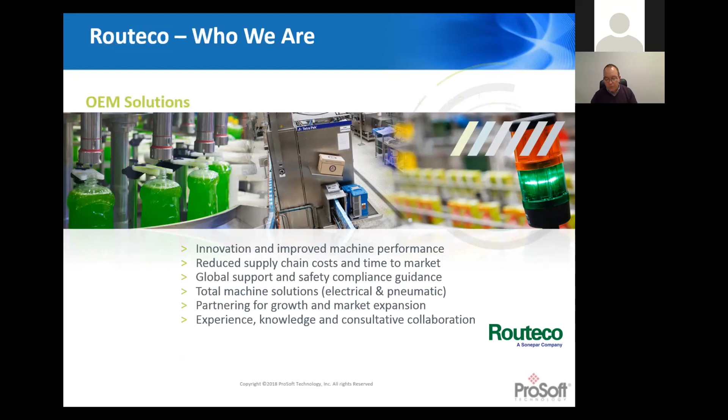We've got a national chain of offices covering the UK, Ireland, and the Netherlands. We offer solutions for OEMs, machine builders, bringing value to the OEM business. We also have a range of manufacturing solutions, such as training services, engineering services, safety services, online and telephone support. This is in addition to value-added services such as assemblies for repeat small panels, e-business solutions, technical support and training.

Routeco have got teams of product support specialists around the country who are ready to speak to you about today's material handling seminar. We have expertise with ProSoft, we've lots of experience, and we're ready for your call. So, without ado, let's pass you back to Miles, who's covered part of today's product and application content. Thanks.

Thank you, Steve. So now I'm going to quickly talk about who ProSoft Technology are.

ProSoft Technology are industrial communication solution providers. Basically, we help you to connect to, optimize, modernize, and migrate legacy applications to modern Ethernet-based solutions. We can help you to connect all those legacy systems to your existing PLC, and we have the application expertise to back that up. We are very focused in solving our customers' challenges through our range of solutions, and customers trust ProSoft to help them to deliver what we say.

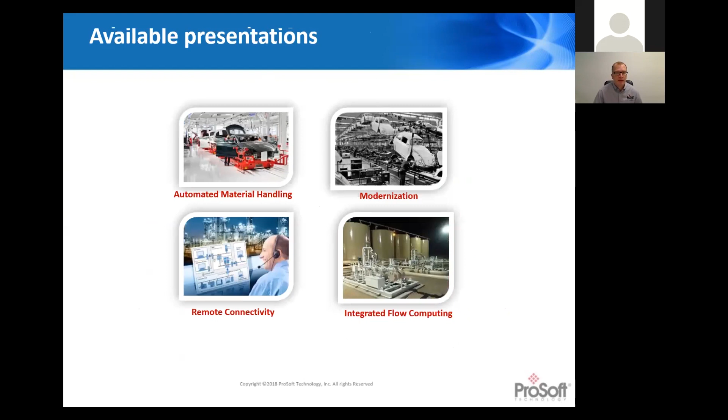So what I'd like to do now is to talk about automated materials handling and the wireless solutions involved in that.

So what type of solutions are involved in automated materials handling? Well, the obvious one is AGVs, or automated guided vehicles, where they take the heavy loads around the factory as an alternative to forklift trucks. Then we have the electrified monorail systems and skillet conveyors, which are mainly used in automotive manufacturing, but can be used anywhere to basically carry the car or the heavy load around the factory so people can work on it as it's rotating around. Then there's also the warehousing solutions, which we can use, which is the automated storage and retrieval systems, sometimes called rack stackers, and also the crane systems.

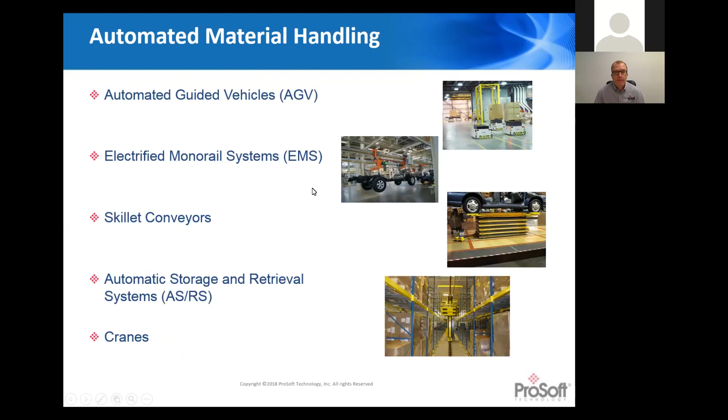So why do customers use automated materials handling? Well, the first one is obviously to reduce labor costs. In an ever-increasing labor market, reducing labor costs is a quick way to reduce your expenditure.

Also, a lot of accidents are caused by forklift trucks as they travel around the factory. So to improve worker safety, a lot of people are now integrating AGVs into all sorts of different markets, not only in automotive, for example, but also in places like healthcare and things like that.

Also, we can improve operational efficiency by eliminating faults due to human error, and helps manufacturers to achieve higher quality, reliability, and efficiency through an automated materials handling solution. Also, it provides access to hostile environments, so cold storage, clean rooms, where there may be an environmental issue. Also, by making it automated, it removes or replaces that kind of human error again, where they could pick the wrong parts, etc., and also damage the products in transit.

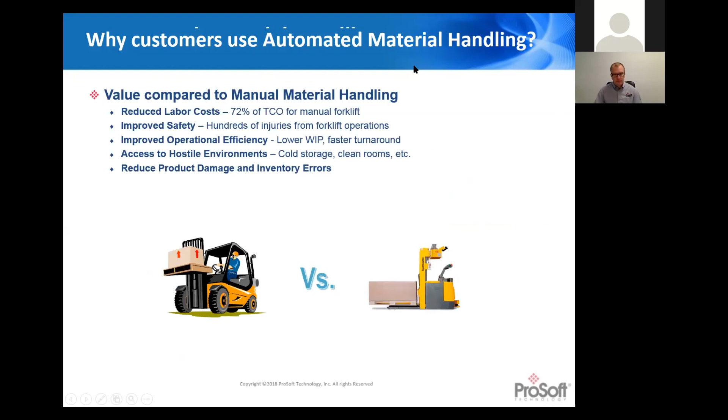However, in industry, there's lots of RF noise, which can impact on your wireless network. Also, constantly moving parts, which can cause reflections, and obstacles to the wireless system as well.

You're working in a very enclosed space with unusual work paths, and a commercial radio, for example, may not work correctly because it may cause you to have timeout, because commercial wireless systems tend to be very good for sort of printing or Netflix, for example, where you don't really care if it's buffering. But if you have a wireless problem, it then causes a network controlled timeout.

Also, the environment, you have to look at the environment as well when you're looking at a wireless solution. And of course, you've got to maintain it, and your maintenance people may not be wireless experts. So you need to have partnership with a company that can help you to get the best out of your wireless system. Also, you may be building a plant in a remote location or a country where you need to have the local certifications in place to have that reliable communication for I/O and safety equipment.

There are challenges with the robust network. Advanced machines need a highly reliable, high-speed Ethernet-based communications, so they need to have the same for the wireless communications. And each end user environment is different. We always look at these things separately, just so we're not doing that kind of cookie cutter type application where you think it's going to work in one place or work in the next place.

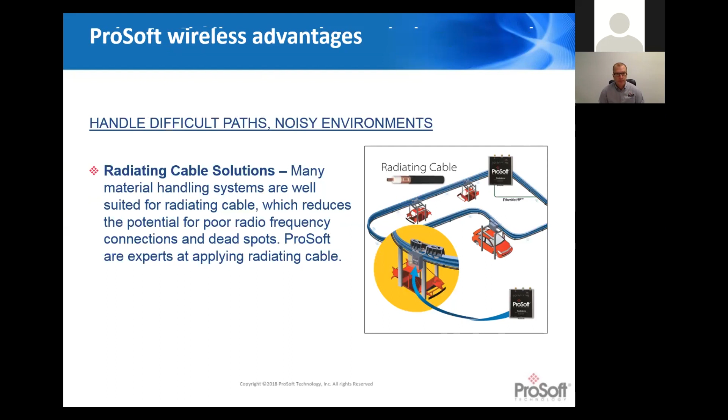However, our products are industrial rated products. They have an extended operating temperature of -40 to +70 degrees, hazardous location certification, and industrial power options, either through 12 to 24 volt DC or through power over Ethernet, which has advantages.

So if you wanted to reduce the losses from the antenna to the radio, you can actually move the radio closer to the antenna and run the power over Ethernet cable back to the main switch. It's DIN-rail mountable, so you're not in a situation where it could fall out. Also, it's shock and vibration tested, so for those mobile devices going around the factory, there will be vibration from the actual machine. We also have all the local country approvals and certifications required for you.

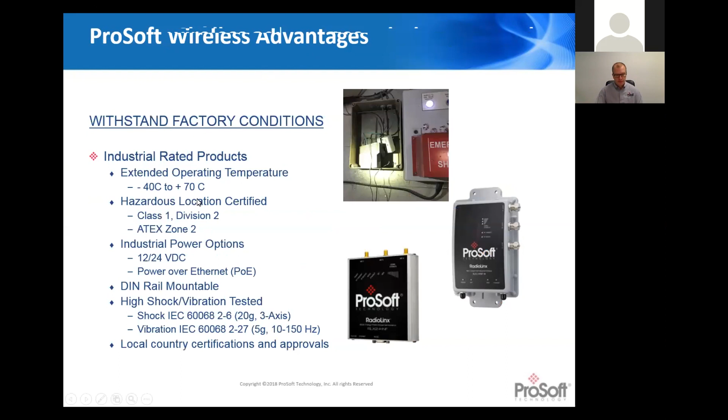We have tested RLX2 radios, and we noticed that one access point is configured as a master. Does this master take part in the roaming process, or do the clients roam independently?

Basically, it's all part of a bigger system. I'll come to the details of it later on, but the radios themselves continuously check the best signal to the access points. So it's mainly on the client side to the master, but it's continuously checking for signal strength, whereas other competitor solutions may use a threshold limit, for example. If it gets below that, then it would roam. But ours is continuously searching for the best one, and then it would roam to the latest client.

Okay, this is one of the first success stories I'm going to talk about today. We had a car manufacturer that needed to reconfigure several plants to manufacture new models. Every time they brought a new car out, they had to change it slightly. These lines require highly reliable I/O communication between the moving AGV and the skillet to the master control system. But the automotive plant itself presents many issues for wireless applications, including interference with surrounding networks, reflections from metal parts, moving parts, mobile obstacles, and unusual paths of the vehicles.

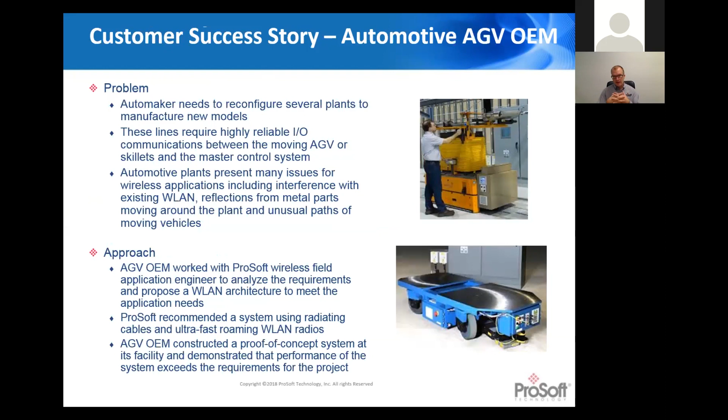So the AGV OEM worked with Prosoft field application engineers to analyze their requirements and propose a wireless network to meet their application needs. Our application engineer recommended a radiating cable solution and our fast roaming wireless LAN access points. The OEM created a proof of concept system at the facility to demonstrate it to the customer. The customer selected our RLX2 IHNF radios for their ultra fast roaming capability, and they also selected the radiating cable because it had several advantages, one being consistent signal strength along the carts throughout the pathway.

And the leaky feeder followed the track of the conveyors, so it's nice and easy to set up as well. And we had the experience - pre-sale and post-sale support was a key value for that OEM.

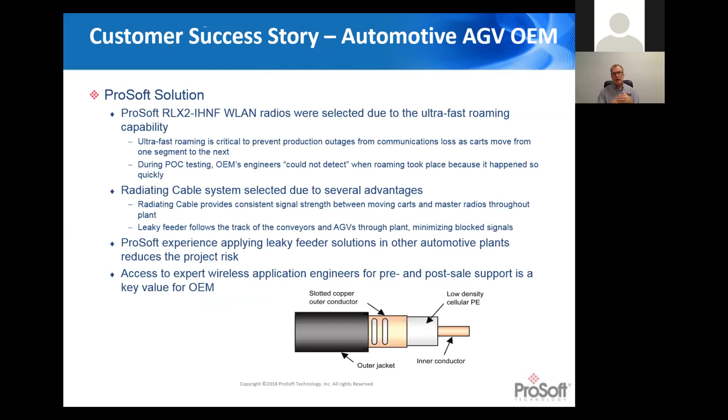This is an automated storage retrieval system, or a rack stacker application. This is for a steel manufacturer in the UK who needed to put heavy duty steel coils onto a shelf. The shelves themselves were very narrow, and they were concerned about reflections from the coils and shelving units, which would cause them issues in the past.

So they worked with Prosoft and Routeco to upgrade their DH Plus system to a modern ControlLogix system, introduced an Ethernet IP network, and also used our radios with a Radiating Cable solution, which was mounted along the line of the rail that carried the AGV - the automatic storage retrieval system - backwards and forward, picking up the heavy coil and putting them onto the shelves.

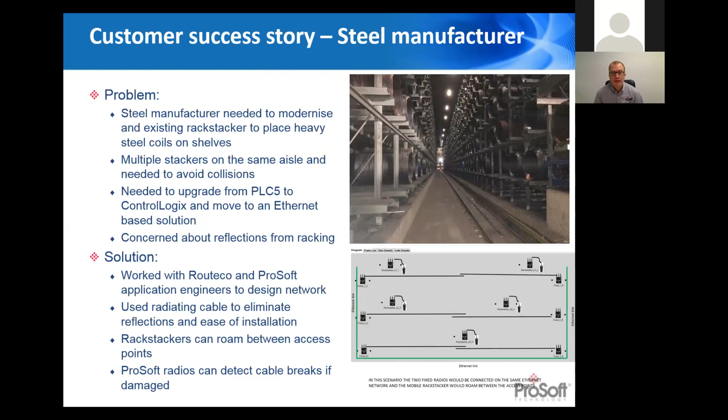Also, they were concerned about cable breakages and being able to detect that, because they'd had an issue where one of the systems dropped the coil onto the rail and broke it. So with our radios, you can actually detect a break in a Radiating Cable solution.

So these solutions can be used in any sort of environment - not only in automotive or heavy use, but also in healthcare and also in amusement rides, which is what this OEM did. They had a problem to replace the slip ring, which required a lot of maintenance.

They also wanted to build a system which would allow CIP Safety communication through it as well. So we proposed a solution which involved our radios with Radiating Cable, so they could improve their data transfer, increase their reliability, and also have secure and stable communication.

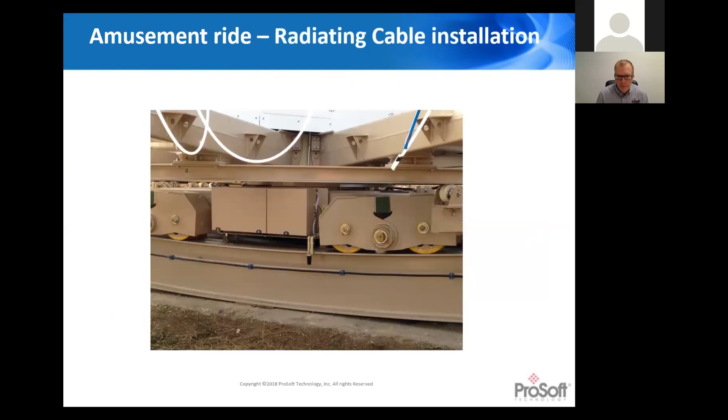It can also be used on packaging machines, so anything that's moving or rotating - any slip ring replacement - you can use our radios with it as well. This customer was an OEM who had machines for sleeving applications. They had a need to replace the slip ring communication with a more reliable, robust one.

And they used our radios with Radiating Cable with two rotating tables, and one master radio was able to receive data from two rotating tables at the same time, thanks to the installation of two Radiating Cables and repeaters.

This is an example of a crane application at a terminal at the dockyard. Basically, the customer needed to increase their operational efficiency, enhance industrial safety - so there was a safety element to it - but then also had to improve the working environment for the crane operators themselves.

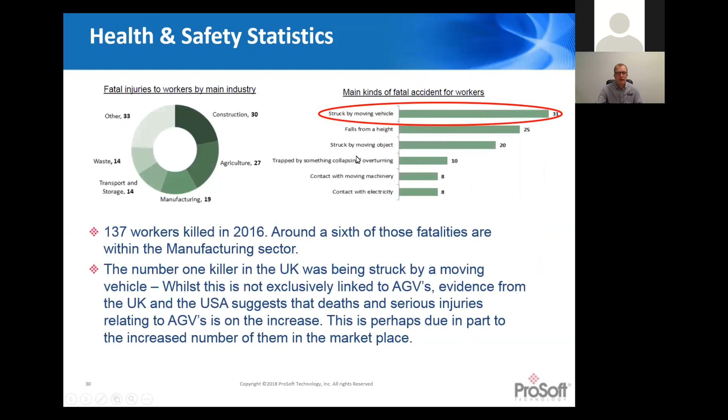So we need to start thinking about how we can put some additional safety into the AGV. In the US, a lot of reports have shown that even though the AGV had a discrete safety system on it, like a laser bumper for example, this failed to detect the person in time and crushed them, unfortunately. The AGV does weigh a lot.

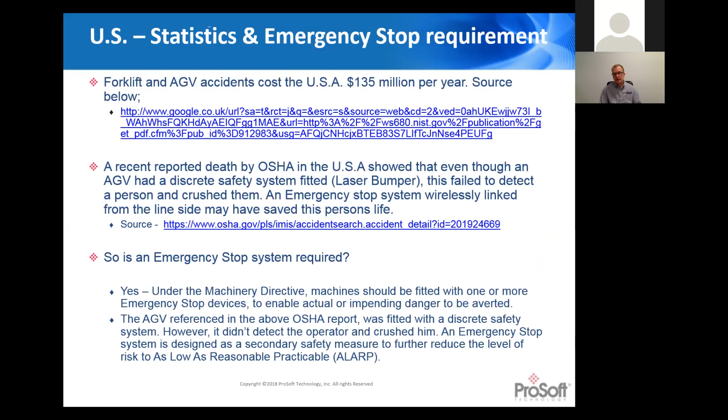An emergency stop system, wirelessly linked from the line side, may have saved that person's life. So if you add emergency stop systems to your AGV network, then you may be able to avert any kind of serious accidents. And you can do that wirelessly.

Now, this example here is obviously using GuardLogix, but there are other manufacturers, Siemens, Schneider, etc., who do safety over Ethernet. If you do it over Ethernet, then you can do it over wireless, because the safety PLC has no idea that a wireless device is connected to it. All it knows is it has a heartbeat.

I've provided a good link to continue the watchdog, etc., so it didn't time out and fail to safe. And you can do those things over wireless.

Question coming in: can you roam with safety over wireless? Yes, you can. It depends on the timeout that you have for your watchdog, etc. I'll come to that in a bit more detail towards the end when we're talking about the sort of things to look out for, and limitations.

In this example, I'll be talking about a crane example, but this could be for anything really. So we need to think about the possible installations for it. This could be used in aluminium smelting, steel production, materials handling, vehicle production. But basically the crane systems are all very similar.

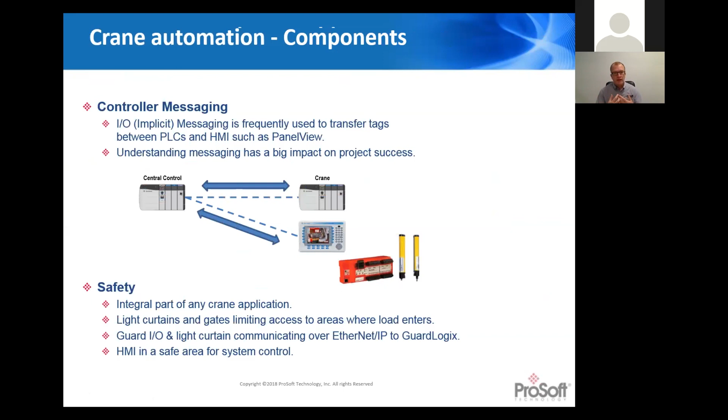So we need to think about the safety network as well. So we think about the traffic between the HMI screen to the PLC, but then also the traffic for the safe area as well.

So if we look at the traffic, there would be a central PLC with 2 remote PLCs and an HMI screen with 1 Ethernet connection to each. So 2 packets per connection per RPI. Now, with the allowable rates of the radio, we're talking now about the 802.11n radios because they've replaced more of the 802.11g radios. So we're talking about 4,000 packets per second maximum.

So we talk about the number of Ethernet IP packets. With those 3 PLCs, we're talking 6. Then with an RPI rate of 20 milliseconds and a packet rate per connection, it's 50 packets per second. You can see how we're within the rates allowed for the system. But we don't want to overload the wireless network either.

So we want to make sure that the wireless system is resilient and reliable. You can either pick 2.4 gigahertz, which has 3 non-overlapping channels: channels 1, 6, and 11. So those are the ones to use.

If you use any other channel, it's overlapped with other frequencies, which may cause interference. However, in the 5 gigahertz band, you've got more frequencies to choose from. Depending on your location around the world, you may have more or less frequencies to use. Also, if you're using the radio system outdoors, on an outdoor crane for example, you have to use the DFS bands with 5 gigahertz frequencies.

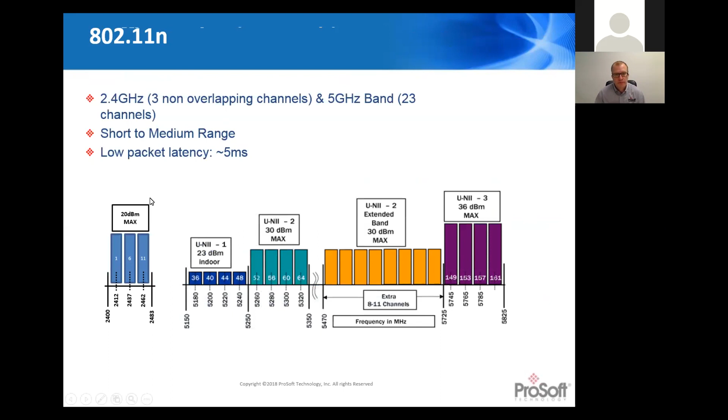Also, our radios are able to fast roam between access points, which is less than 10 milliseconds. We're also able to bridge between multiple Ethernet devices on the machines and carriers. So each AGV may have a controller, I/O, HMI screen, PLC, and that can be transmitted wirelessly without the need for a second wireless controller. It's all built into the radio—one part number will do client and repeater, so it keeps your spares low as well.

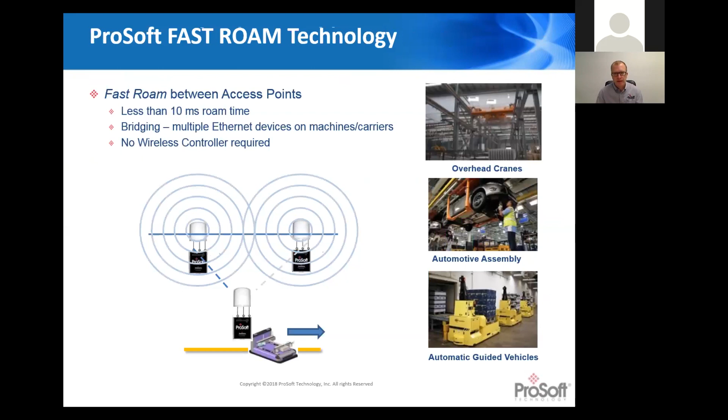Also, this is to illustrate how it's physically connected to a network if you want to do fast roaming for AGVs. For example, you have to have a wired Ethernet network back to the main controller to provide the backbone for the Ethernet so that the client can roam between the different access points as it moves along, so the AGV can move along and get to the pathway.

Which is what they did in this application. This is a Skillet application where the customer required reliable I/O communications between the skillets and the control system to prevent downtime. But they had issues with reflections from metallic environments and unusual paths of moving objects.

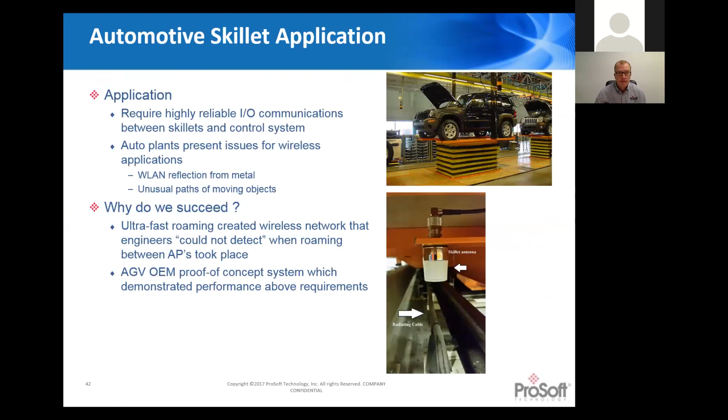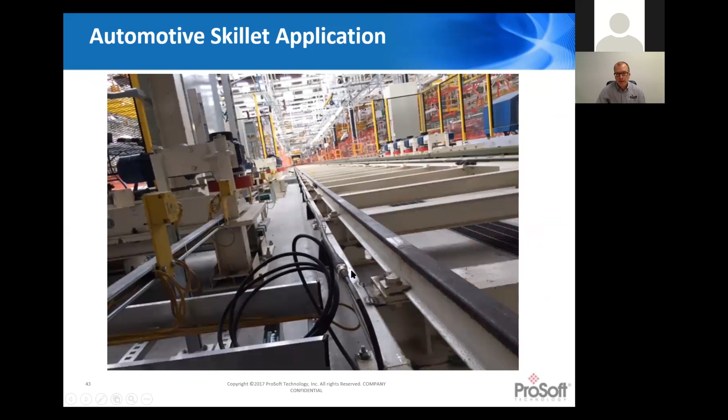The cable itself was over 100 meters, well, split into two, over 180 meters long along the production area, and mounted underneath the floor of the skillet line. It had multiple skillets going across the plant and into a power down zone, and then back again. So they split the cable into two segments totaling 180 meters, with very reliable communication throughout.

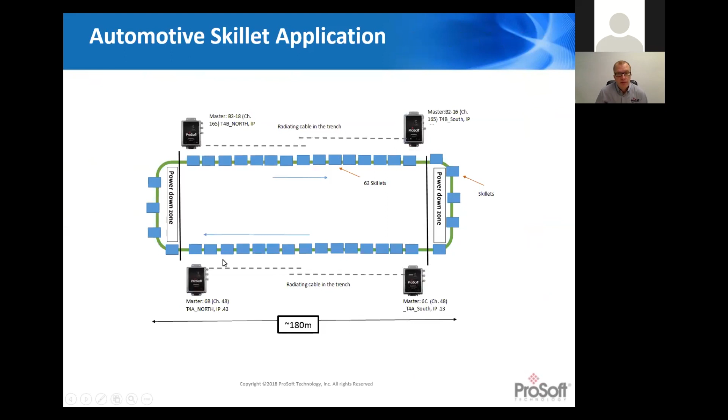Okay, any questions so far? Yes, we have one here.

I have a radiating cable installation guide—do you have a design guide for the radiating cable? Yes, we do. It's available online, or you can speak with your local Prosoft regional sales manager or your local field application engineer, and they'll be able to talk through it as well. So we have one online, along with our software, which we can use to help you, or you can download it yourself.

And help yourself design the network itself. It's very simple to use, with a drag and drop Windows-based user interface. You can also use wizard guided defaults, so you can choose the radio you wish to have. Using the N radio here, you can choose the frequency you want to use. It then has a bill of materials built into it as default settings.

You simply drag them into the network itself, then link them together by doing a drop and link, putting in the distance between the antennas, and then you can actually modify it. So if the link wasn't strong enough, you can modify the actual bill of materials to generate a better link, so you can review your choices.

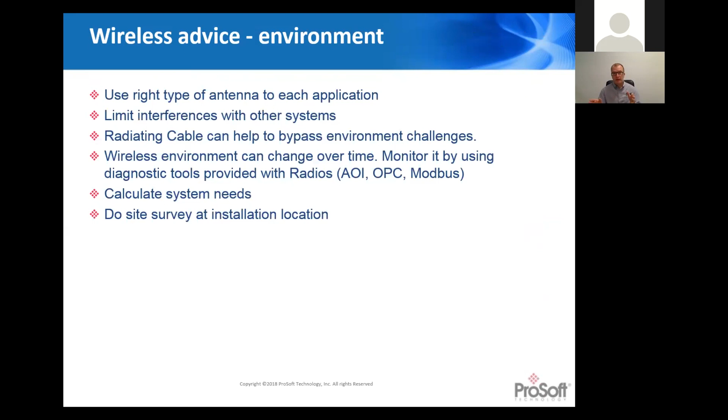And also use our tools to calculate your system needs. There are other tools there as well from your PLC manufacturers, which help calculate your RPI times, etc. And then also do a site survey at the installation location - it will save you a lot of time later on when you're close to production if you do all the hard work first.

Okay, any questions?

What distances can you go with the antenna? Basically, that depends on the application. You need to use our design tool to actually calculate the signal strength you can achieve. With a nice parabolic antenna, for example, the distance can go kilometers long, but typically in an indoor application you're talking 500 meters. So that's a very loaded question - you can basically go any kind of distance that you require.

Any other questions? Okay.